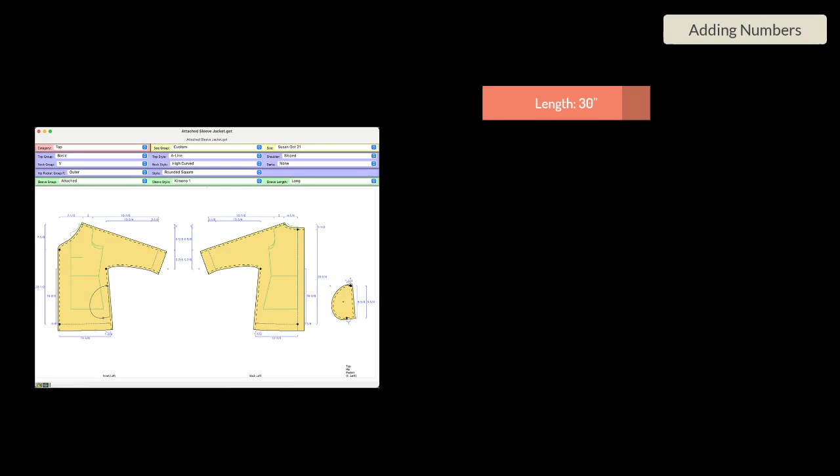Then I like to add numbers to my thoughts. So I'm going to go for a length of 30 inches, a neck width of 8.5, a front neck depth of 7.5. I'll plan for about a 3.5 inch overlap at front and a center back extension of 2 inches deep on the fold, which will be 4 inches that will be built into a box pleat.

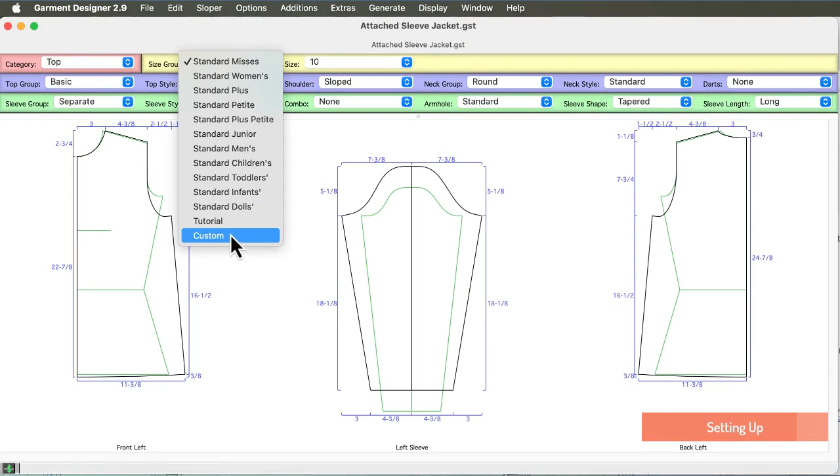Here I am in Garment Designer, and this time I'm going to work with a custom size. So I'm going to go into custom and I'm going to choose myself, one of my more current sets of measurements. You can see I'm not a perfect figure.

And then I'm going to go into display pieces and choose to have both fronts displayed but in an independent mode. And at the same time, since the sleeve is built in one with the body of the garment, I'm going to turn the sleeve off here.

So this gets me this far, and then the next thing I like to do is to put in the length so I can see everything in proportion. And I will do 30 inches for the garment length.

It's fingertip length on my body. And so now I can have the 2 fronts and a half back. So I'm ready to go and start progressing with the styling.

If you click inside a piece, you can see all the segments that construct the piece. You can see which ones are straight and which ones are curved. And then those can be adjusted, which we will probably be doing some of that in a little bit.

So the first thing I want to do is go ahead and do the attached sleeve, because now I can see exactly how this jacket is going to look.

Usually I work in a clockwise manner, so the next thing I'd want to do is to get my neckline correct. So I'm going to use a V neckline with the high curved neckline.

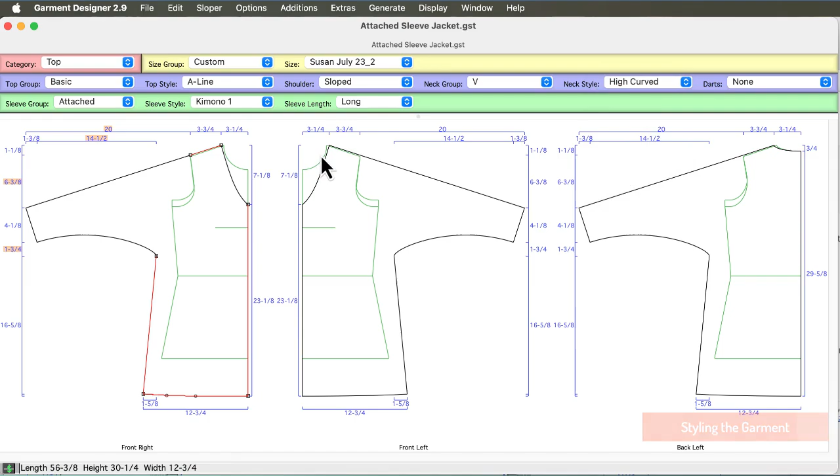But I want to be able to have the width I chose, which was an 8.5 inch wide neckline. So I'm just going to click on the back and I'm going to pull it here. I could have easily clicked on the front, but it's a little easier to read the measurement on the back. You will probably get this warning, and I'm just going to suppress it.

It doesn't like the angle right here at the back, and there is a way to go have it tell you more explicitly. So what I usually like to do is lower my center front and or back, always the back here, a little bit further.

What you want is a 90-degree angle right here and right here, because that means when you sew the shoulder seam of this garment together, you will have a beautiful transition. So that has corrected that problem.

I often wait till I'm done and do all the angle corrections at the end. So we are aiming for, I'm a little too wide. I wanted 8.5, which means I need to be 4.25.

Notice how I'm sliding on the slope. I'm using my arrow keys now. There, now I've got it, and I'll just go up 1. So 4.25 is 8.5. I wanted my front neck about 7.5 inches deep.

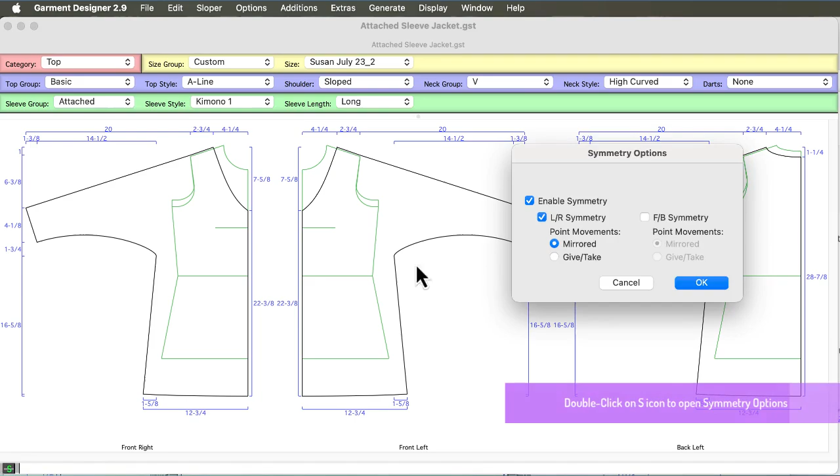So now I'm at the point where I need to do things to the front that I'm not going to do to the back. So I'm going to go in and I'm going to turn off front back symmetry. You get there by double clicking on the S icon. And so what I'm going to do now is I'm going to raise the front neck just a hair. And then I'm going to actually kind of flip this curve a little.

But I want to add the extension for the overlap of the front jacket. So I'm going to click on the center front, and I'm taking note of the width of the garment.

It's 12.75 inches, and I want to add 3.5 inches to that. So that's going to be 15.5, 16.25 is where I'm heading. So I'm just going to slide this over and then check a reading.

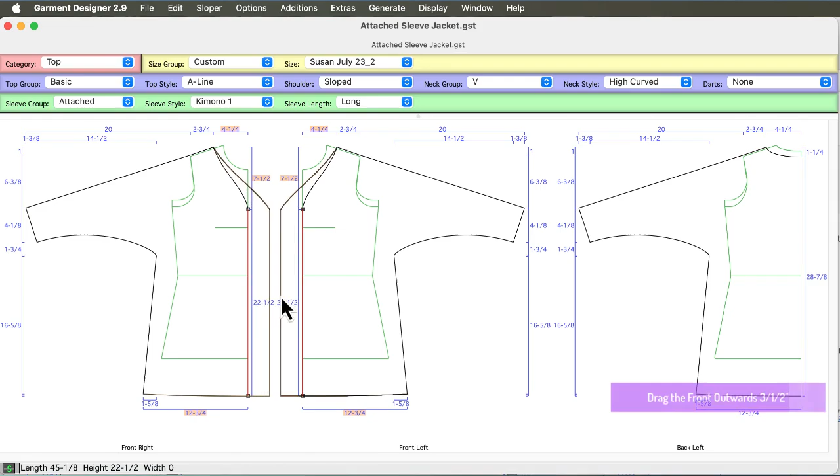I'm not there yet. Now I'm just using my arrow keys to nudge. Whoops. And now I have that. If I want, I can turn on the grid. So you could actually count 1, 2, 3.5 — you could count how many inches you've added.

Usually when I'm working, I only have the grid on for counting and checking ease and things like that. At this point, I may want to scoop out this neckline a little more and just style it.

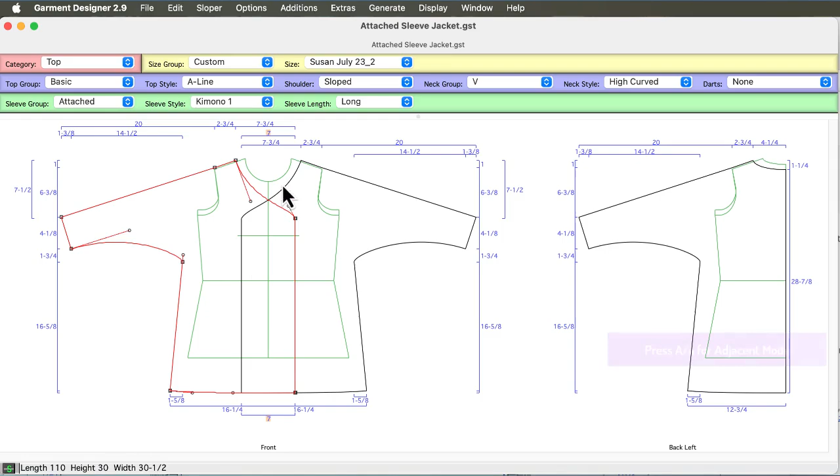Now I like to see how this overlap is going to look in the garment. So I'll click on one side, using a shortcut - I'm pressing A for adjacent. Now my jacket has been put into adjacent mode, which allows me to see how that overlap looks when worn, and I like it.

I'm just going to click in here and press I for independent again. So I've got the neckline done. The sleeve length will already be adjusted for me. If I want to go right down to my wrist, that's what I'll do.

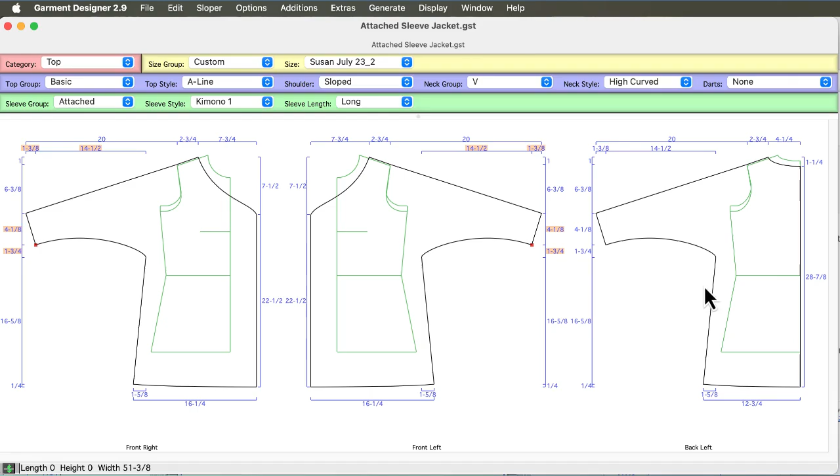At this point, I might choose to make it wider, but if I do, I have to remember to turn on symmetry. So let's go do that. We're going to make our cuff a little deeper, and then we might choose to pull this down and maybe re-arc this curve. You have all kinds of control in that. So we'll let that be.

Now I can put the grid on again and see how many inches of ease I have between my hip and the side seam, and I'd say that's almost 2 inches, a 2-inch pinch, which would be a total of 8 inches, and that's good. So I'll just use a shortcut to turn the grid off.

I'd say the front is essentially done, and the only thing missing is on the back. I want to add an extension for the box pleat. So once again, I'm going to turn off front back symmetry, click away, click on the center back, go to additions, add an extension. If you're being good, you will name this center back extension. And I want it to be 2 inches, so you type in 2, and it adds the extension.

So everything in the body of the garment is now complete, except that now we will add the pocket.

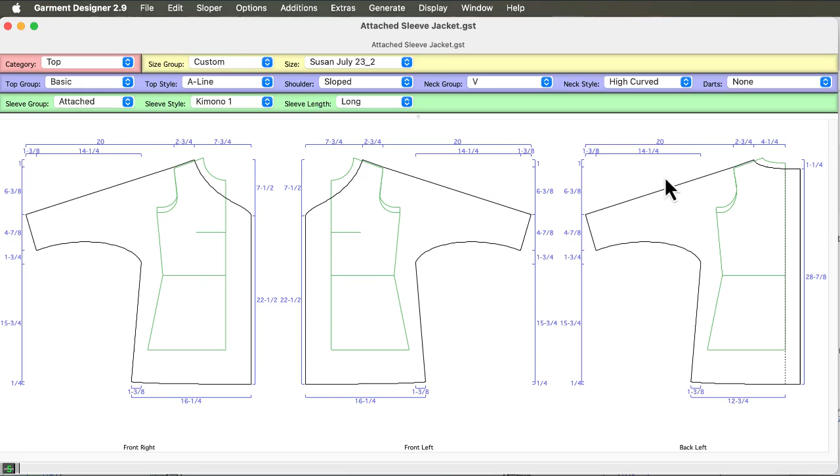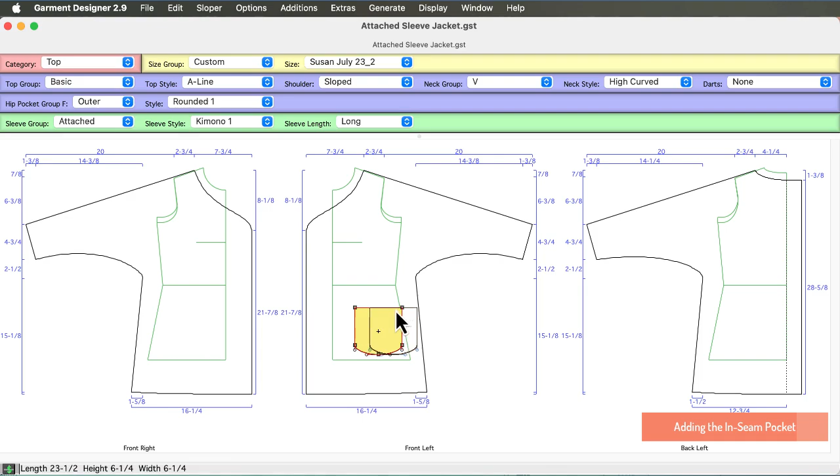Pockets can be found in the extras menu. This is where you go to dress up a pattern or a garment. So I'm going to slide down to the pocket area and choose front left. This will open up a pocket, whichever one I had used last in the session. I'm going to use an outer pocket rounded, select it, then click on an edge so I can drag it over to the side seam. And then I'm going to elongate, and then move this over to match my side seam.

I could go down into the bottoms of the patterns where skirts and pants are and grab an inseam pocket, or I can simply build one up here. But I'm just trying to demonstrate the use of click and drag, so we're going to do it this way. So I'm pulling this over.

You're going to think I'm a little crazy, but I know that I have control over these curves, and we've got another curve control point down here.

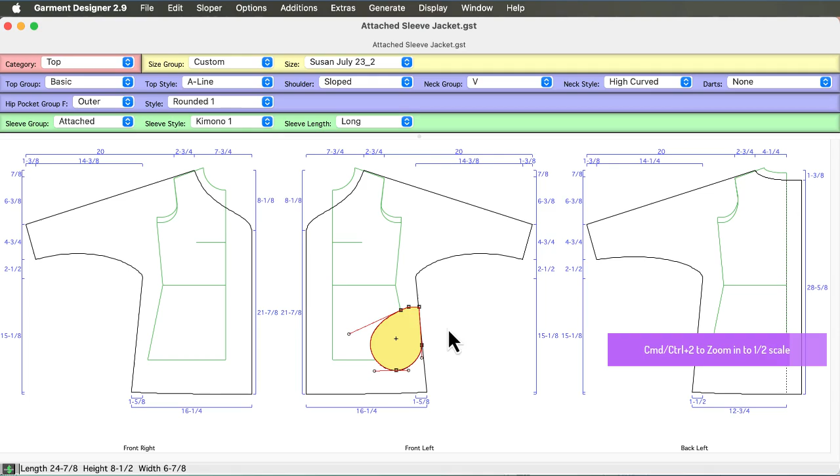If you want to zoom in to see things better, you can press Command or Control 2, and that will zoom you in, and then you go find your area. Now I can see a little better what I'm doing here. To zoom back out, let me just move this over. Zoom back out, I'll do Command or Control 0, and now I can see here.

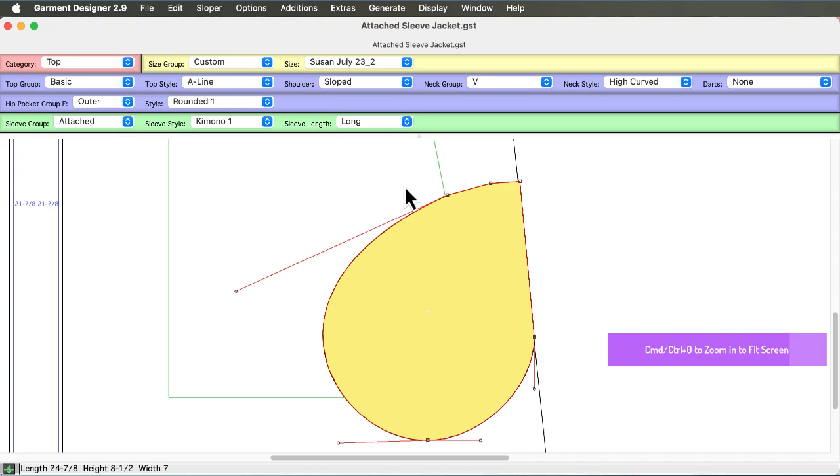So let's just say I'm saying this is good enough. I would spend more time, but let's just say. I'm going to go separate the pattern piece, because then I can see the dimensions, I can confirm, and then I'll print a separate pattern piece.

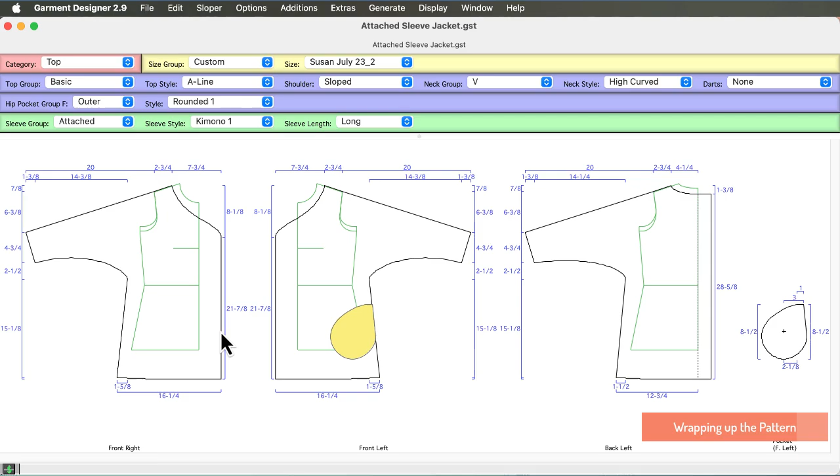So at this stage, we're ready for all the additions one puts on a pattern before printing it. We're going to add facings, hems, and seam allowances. Let's do facings first. I'm going to grab the front, but I don't want the back - the facing is only on the front and around the neck. So I'm going to click away and turn off front back symmetry.

I'm going to select the front, hold the shift key, select the neckline and the back, then go to Additions, Add Facing. I could name it center front and neck, and I'll leave it at the default of 2 1/4 inches.

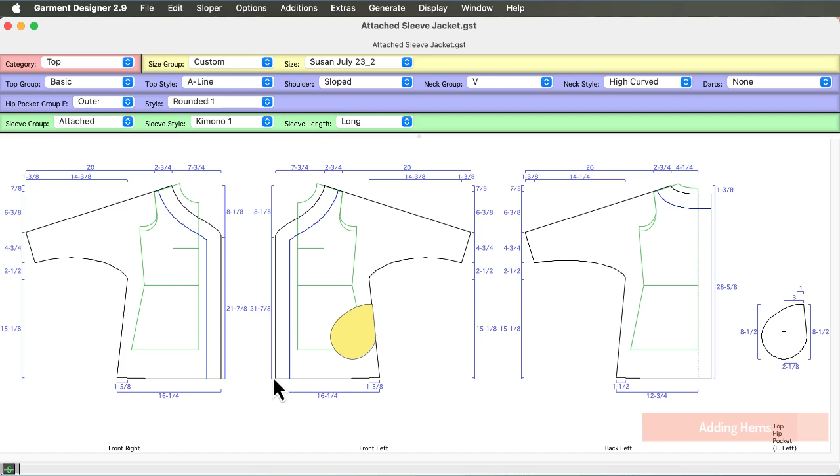For hems, I'll click on the front, hold the shift key, grab the back, then add hem. I'll call it lower hem and let it be 2 inches.

I also want hems on all the sleeves. Holding the shift key again, Additions, Add Hem, and we'll just let these be 1 inch. I won't get fancy on the naming.

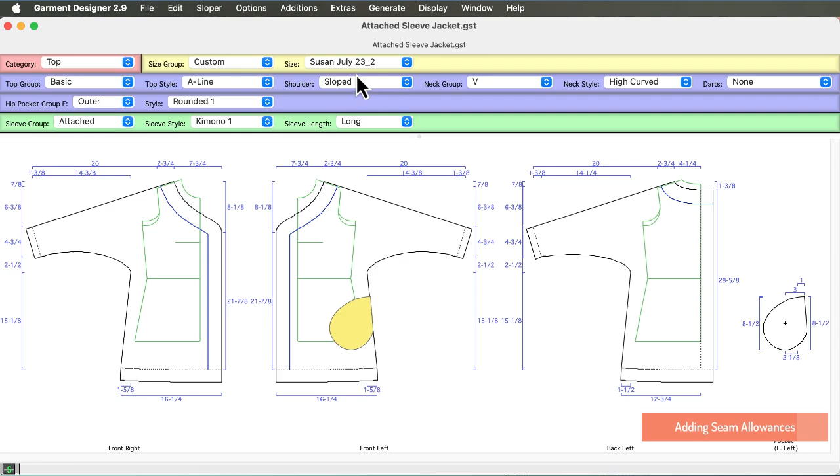All that's left now is seam allowances. I'll go to the Additions menu, Global Seam Allowances. I always take 1/2 inch, though I could have 1/4 inch in some places and 1/2 inch elsewhere.

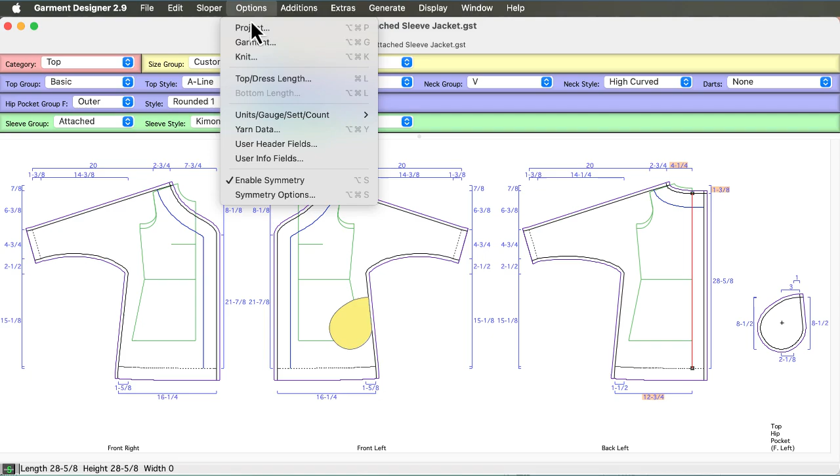But I don't want a seam allowance on my center back here, so I'll select the center back extension, go to the Additions menu, choose Custom Seam Allowance, and type 0. Now that's taken away.

So my garment is now complete. The pattern is ready, and at this stage I would save.

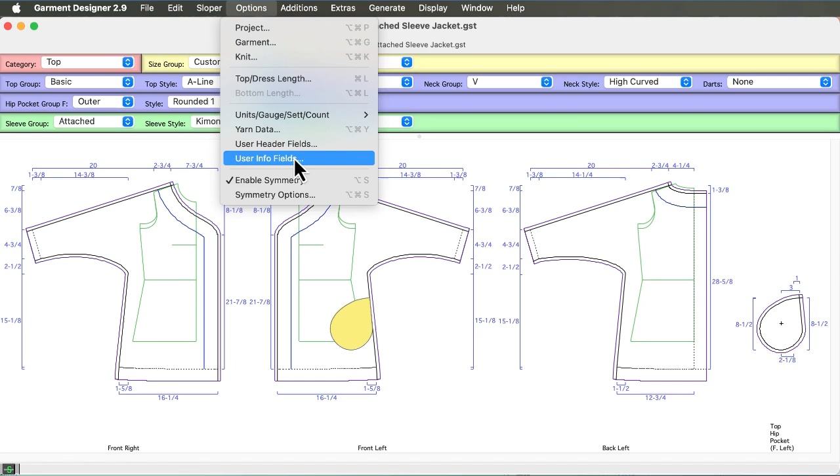Again, I could go into the Options menu and use the header fields to name the project, which I'd done earlier, so it has this name. I put in the fabric too, and all of this will print on the pattern for me. So everything is done there.

Usually at this point I will print what you're seeing on the screen in landscape mode to have a schematic of the project.

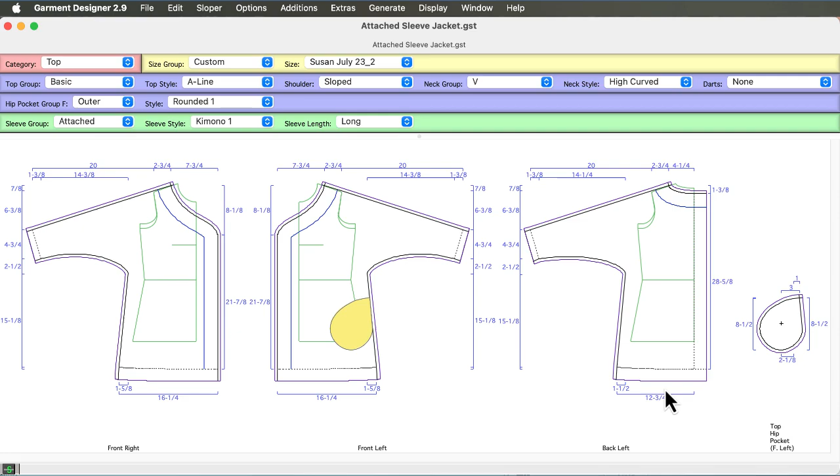I could choose to turn off the right front, just so I'm not using as much real estate on the screen. Now let's say I'm ready to print the paper pattern.

Usually what I do then is turn off the dimensions, turn on the grid, and go into final pattern mode, which will put notches where they belong. At this point I go to scale to actual size.

Then I can go back to display again and ask for a print preview, because that shows the paginations for all the pages. Right now this pattern would take 37 pages.

I often go in and confirm if it might be less if I switch my orientation to portrait mode, but it's going to take more. So I'd be much better off sticking with landscape mode.

These you can tape together. I can also increase my paper size and look at the size of the pattern so I'm printing one pattern page per sheet, or I can set it up to do projection sewing. So there are several ways of outputting.

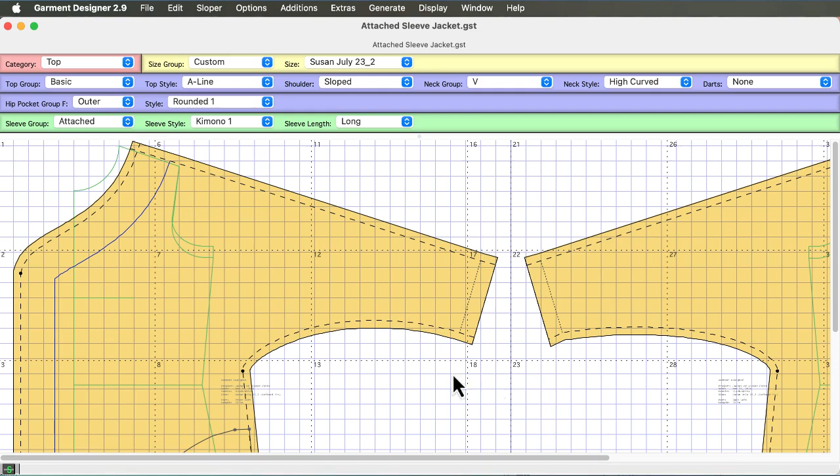But basically, that's it — we have completed the garment. Let's go take a look at some of the finishings.

I also used the lining fabric from the Hong Kong seam finishes for the pocket. Not necessarily the most functional choice, but a necessary one since I didn't have any excess fashion fabric.

So that completes our pattern quickie. I hope you enjoyed it. Take the time to walk along with me and do it, pausing and starting as you need, just for the practice of learning to use your software.